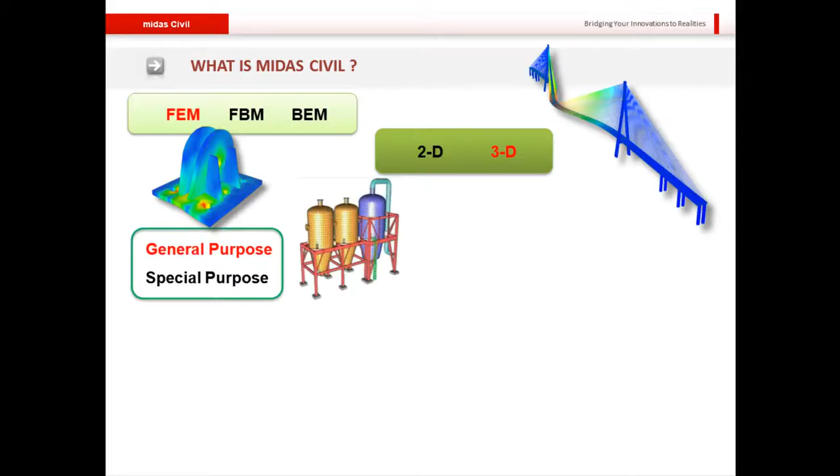So what is Midas Civil? Well, Midas Civil is a 3D finite element based package that is geared towards bridge engineers, but is by no means limited to bridge engineers. It is a general purpose product that can be used to create even models of structures like plant structures, tanks, silos, dams, tunnels, and many other such models. So even a geotechnical engineer can find some use for modeling and analyzing in Midas Civil itself. But of course, it is geared towards bridge engineers, and specific design functions are available for the bridge models only.

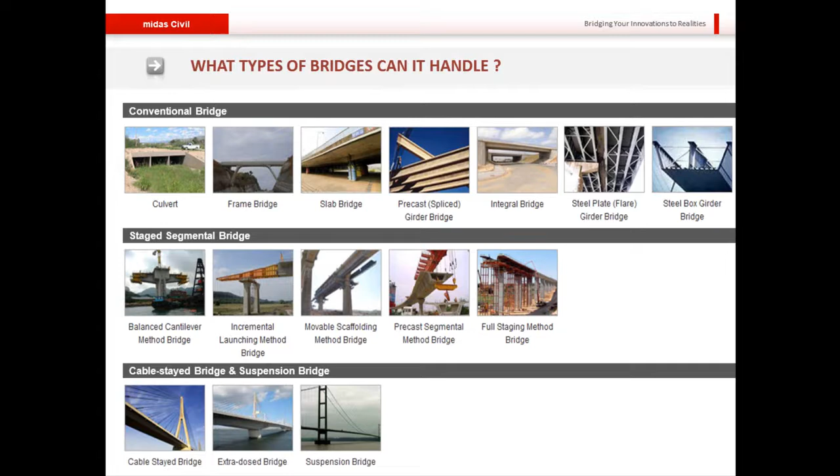So what type of bridges can Midas Civil handle? Well, it can handle quite easily the conventional bridge types like culvert, slab bridge, or girder bridge. It can even take care of the staged segmental bridges like balanced cantilever bridge, precast segmentally constructed bridge, the full staging method construction for bridges. So each of these construction methods can be easily dealt with in Midas Civil. And finally, Midas Civil is also very adept at handling cable stayed, suspension, or extradosed bridges.

So coming now to the modeling philosophy. First, I'll talk a little bit about the initial sizing. Aside from loadings, the pylon and deck geometry as well as the orientation are driven simultaneously by cost as well as by aesthetics. So normally the loadings only play a part in finding the section dimensions. However, the orientation and the overall shape of the bridge is driven usually by the aesthetic requirements.

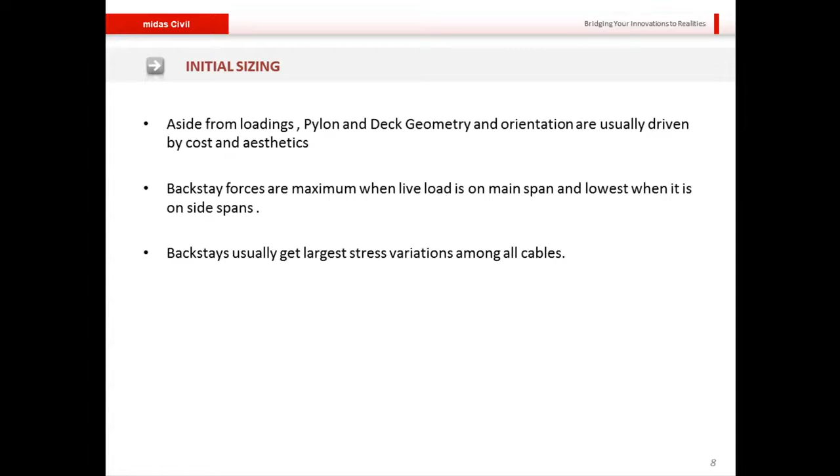Now coming on to the span length, or more importantly the ratio of side span to the main span. This ratio is determined by the backstay forces in the side spans, and the backstay forces are maximum when the live load is on the main span, and it is lowest when the live load is on the side spans. So the backstays usually get the largest stress variation among all cables, and therefore the span lengths have to be kept such that this variation does not exceed the fatigue strength of the steel material used in the cables.

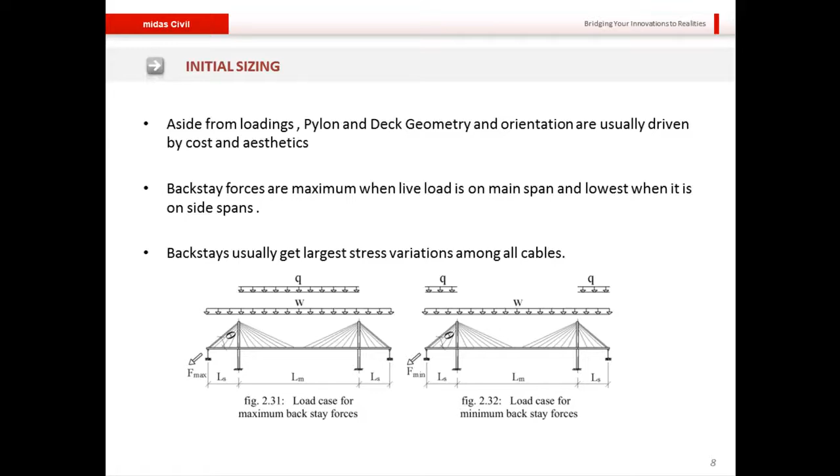This particular graph that I'm showing you is from Gimsing and Georgakis in 2011, where they investigated the relationship between the ratio of the side span and the main span, which they've plotted on the vertical axis, to the ratio between the live load and the dead load, which they've plotted on the horizontal axis. The value of zeta that you see just above the curves is the ratio between the absolute minimum backstay force to the absolute maximum backstay force.

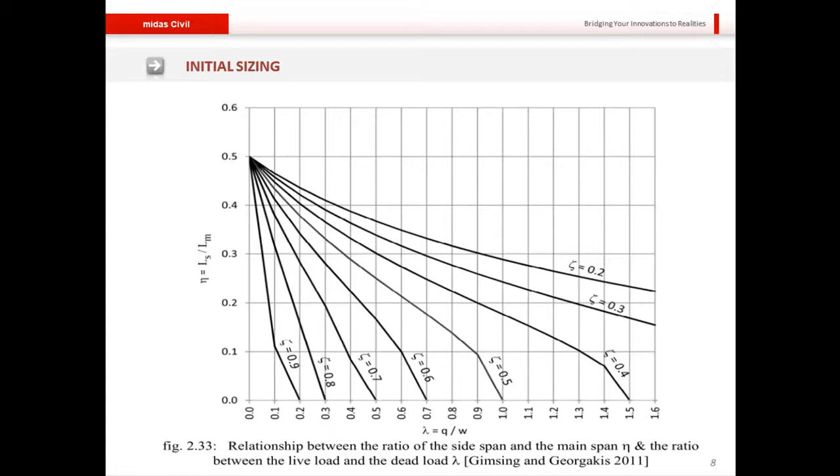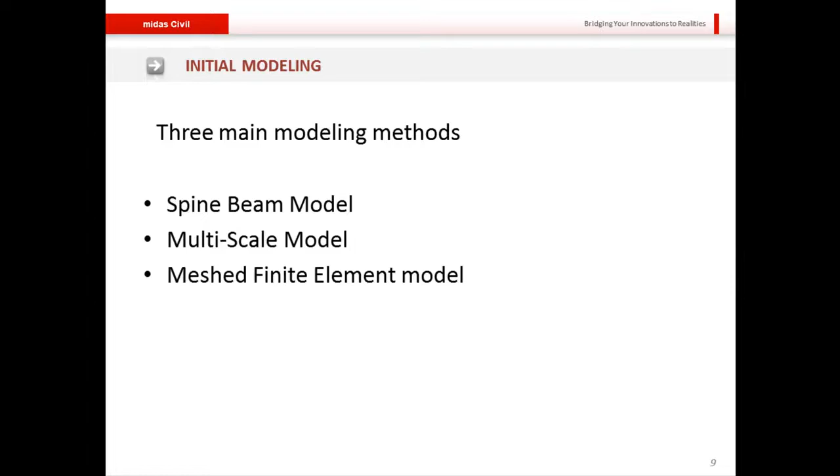Next we'll move on to initial modeling, and here there are three main modeling methods. First we have the spine beam model, we have the multi-scale model, and we have the meshed finite element model.

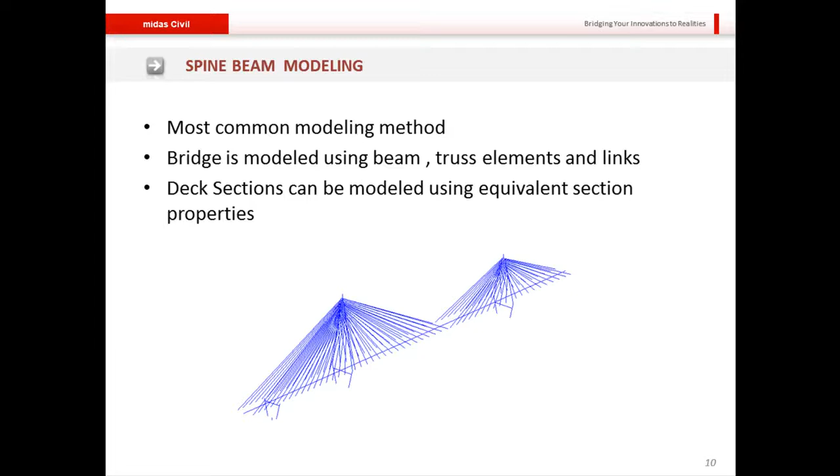First let me talk about spine beam modeling. This is the most common modeling method, wherein the bridge is modeled using beam and truss elements and links that represent the bearings, and the deck section itself can be modeled using equivalent section properties. So for the deck element, you need not actually go for the entire geometry. Equivalent section properties are more often sufficient.

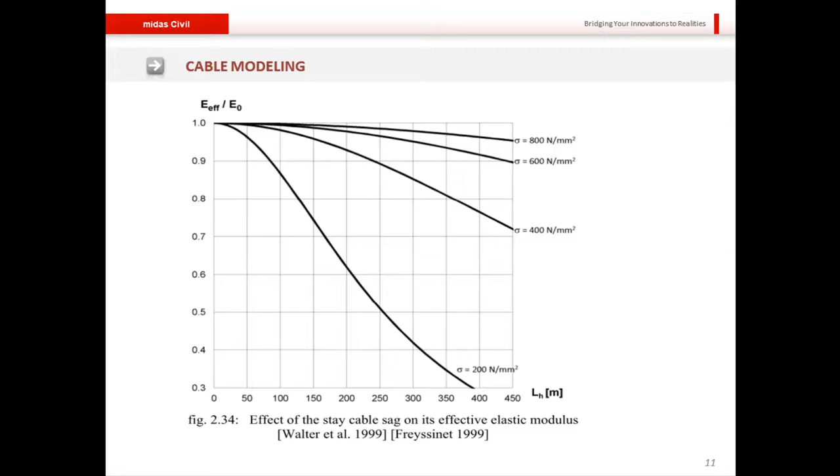This graph shows the variation of the effective stiffness of a stay cable relative to the horizontally projected length, which is related to its total overall length as well. As you can see, for the same amount of axial stress, the longer the cable, the lesser its stiffness, because of the more pronounced effects of sag.

Coming on to multi-scale modeling. In multi-scale modeling, we make use of different elements for creating a unified model of the bridge, so a combination of beam, plate, and solid elements is used. This type of modeling is more advantageous in that it can capture more accurate and localized results. However, in creating such models, one has to be careful and mindful of the different degrees of freedom for the different elements, so the interconnectivity between the beam, plate, and solid elements has to be carefully considered due to the differences in the degrees of freedom.

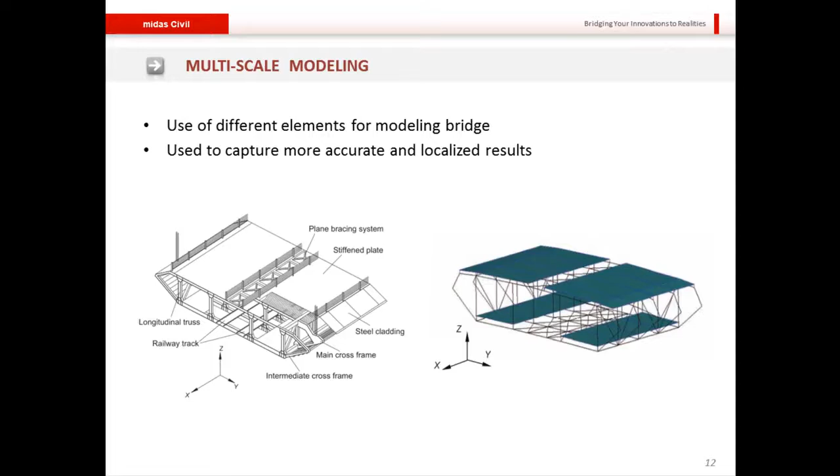And finally, we come to the meshed finite element modeling. This is perhaps the most realistic modeling of all, and it gives more realistic structural responses with an accurate representation of local and global responses. But this is usually quite cumbersome to model an entire bridge, so only certain critical portions are modeled and analyzed.

In this image on your slides, you see a saddle clamp for the cables that were used in the Bonny River Bridge in Nigeria. This particular model was created using our advanced finite element software, midas FEA.

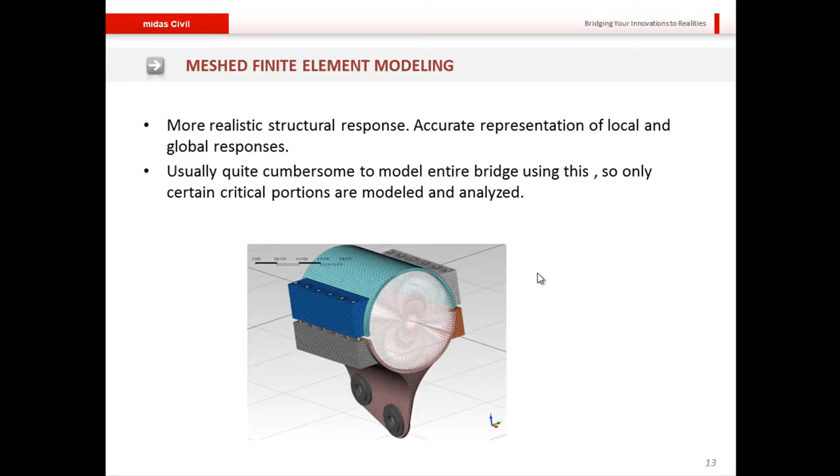Finally, let me talk a little bit about the support systems for conventional bridges. This particular slide shows the 6 common support systems that are used frequently for conventional cable stayed bridges.

In each of these support systems, you will notice that the deck is allowed to move longitudinally in one way or another, while most of the systems utilize expansion joints at the ends. Many others, for example cases D and E, you will notice that the expansion joint is provided at intermediate points. So it really depends on the site conditions, the cost, and the aesthetic considerations on what kind of support system the engineer would like to provide for his or her particular project.

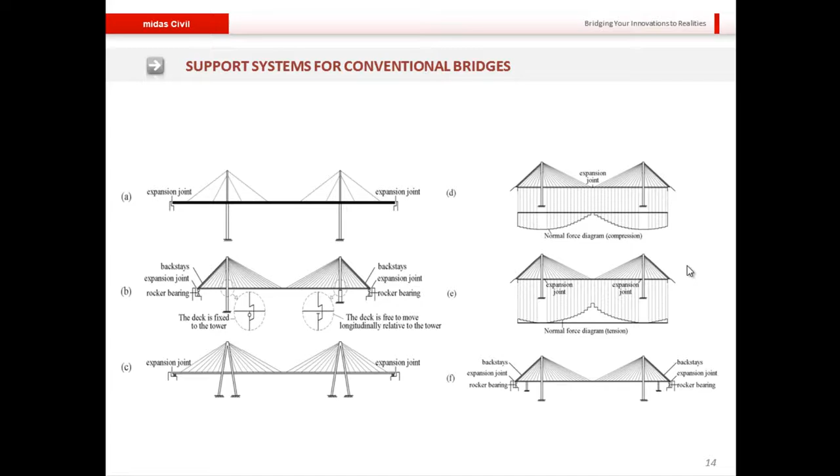So now, before moving on with the presentation, let me switch over to the software and show you how a particular cable stayed model can be made in our software Midas Civil. This is the interface of Midas Civil, and I'll open up the cable stayed bridge wizard. So this is the wizard itself.

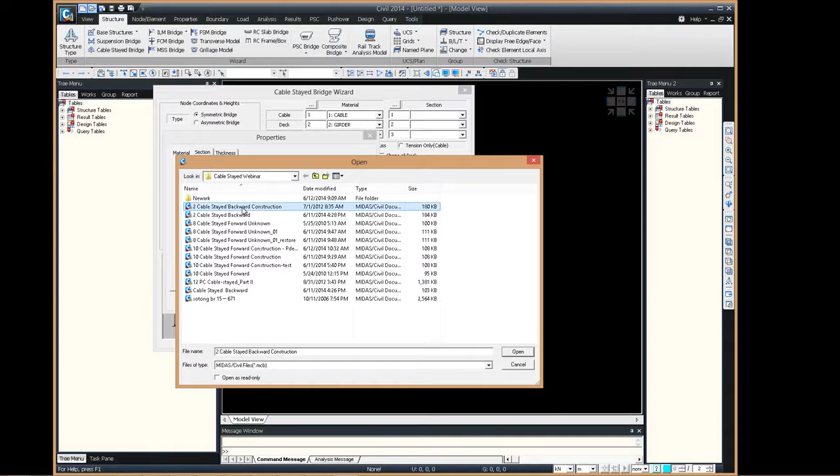Now I'll begin the model. First I'll import the material and section properties from a pre-existing model file. Here I'm importing the material properties from the model file that I had already created beforehand, and now I'm doing the same for the section properties. So here now I have all my section and material properties.

The section types I have used are value type, and in these dialog boxes I can specify the dimensions and the spacing for the cables, and also the shape of the deck. So here let me enter an initial slope of 5% and a total arc length of let's say 220 meters.

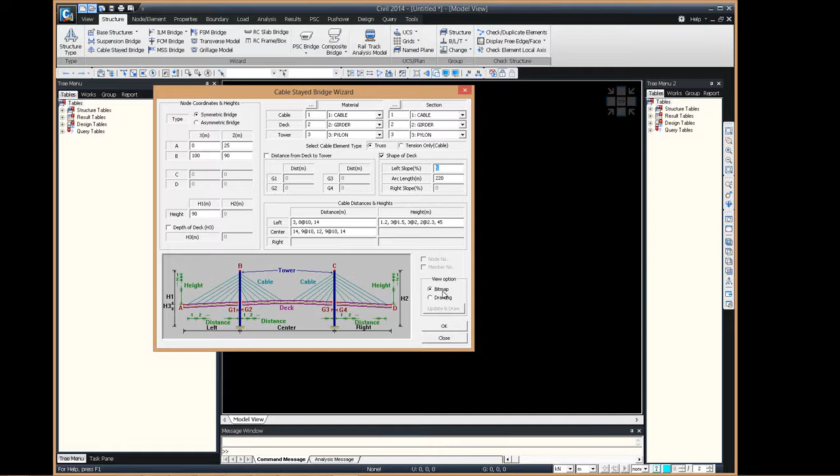If I want to see how the model looks, I can just click here, update and draw, and it will show me how the model looks. Furthermore, if I want to have my bridge as asymmetric, I can choose between the options. For now, let me just click OK, and my model is prepared.

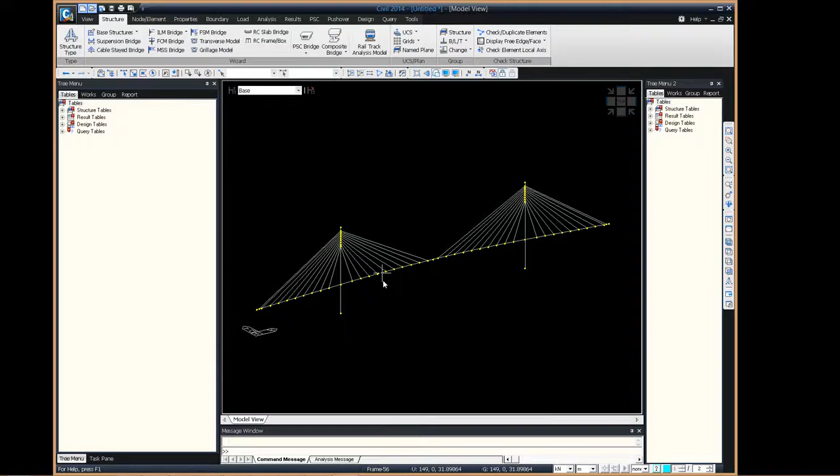Now what I'll do is create a copy of this particular model on its side. Going to elements, translate, I'm going to create a copy 15 meters apart.

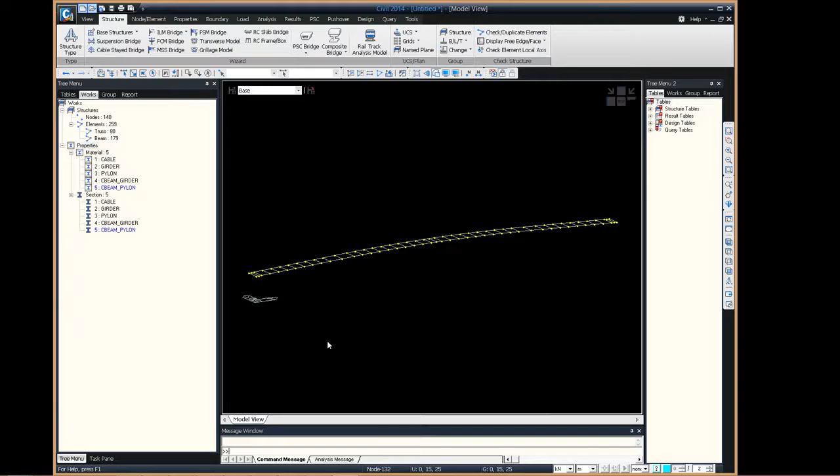Now that I have my copy, I'll activate the deck part and hide away the rest of the model, so I can create the cross beams. I'll simply extrude elements from these particular nodes to create my cross beams, selecting the cross girder material and the cross girder section property. With this, my cross beams have been prepared, and now I can go ahead and make modifications to the rest of my model.

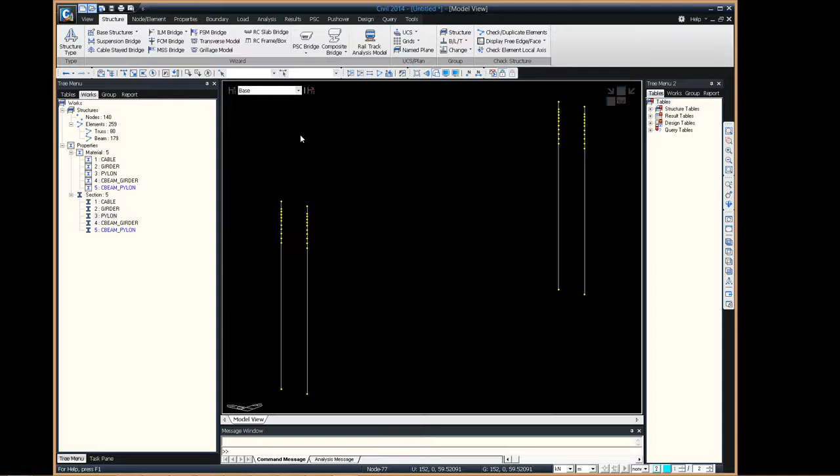For example, let me activate the pier parts, and now if I want to create cross member elements at the pier locations, I can simply do so in this fashion.

So with this, the model is more or less complete at this point. We can make more modifications to it as well, but for now let me get back to the presentation.

So let me now talk about the analysis philosophy. This is the basic philosophy or the basic workflow when creating and analyzing a model for a cable stay bridge.

First, we find the value of cable tension that will give the optimum deck profile for the final model. This is also known as the initial form finding or pretension value of the ideal state of the cable bridge. Once we have found this initial pretension, we do a backward construction stage analysis to find the cable forces during erection. In the backward analysis, we start with a completed model and keep removing elements one by one in an order reverse to that of the original construction staging, and finally we get the member forces within the cable elements, which are basically the erection forces that we need.

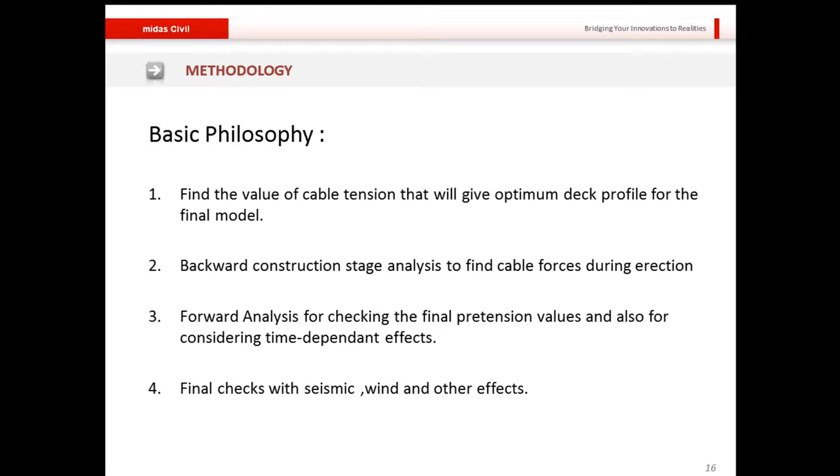The third step is usually a forward analysis for checking the final pretension values and also for considering the time dependent effects, and finally we do checks with seismic, wind and other effects.

So for the initial cable force finding, there are three basic methods: the continuous beam method, the bending moment envelope method, and the influence matrix method.

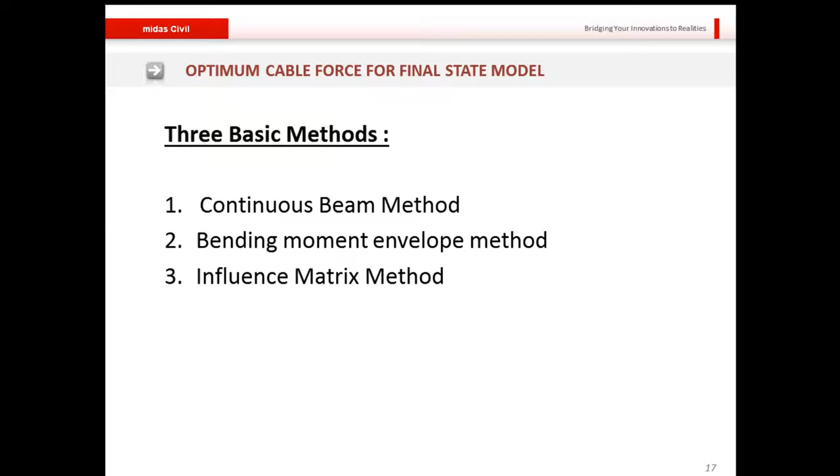Let me first talk about the continuous beam method. In this particular method, the points of connectivity between the cable and the deck are idealized as pin supports, and we find the reaction at each and every one of these supports. From these reactions we directly get the cable forces.

This method has some advantages in that the stay cable location helps eliminate creep in the vertical direction at nodal locations and also gives a very uniform displacement profile.

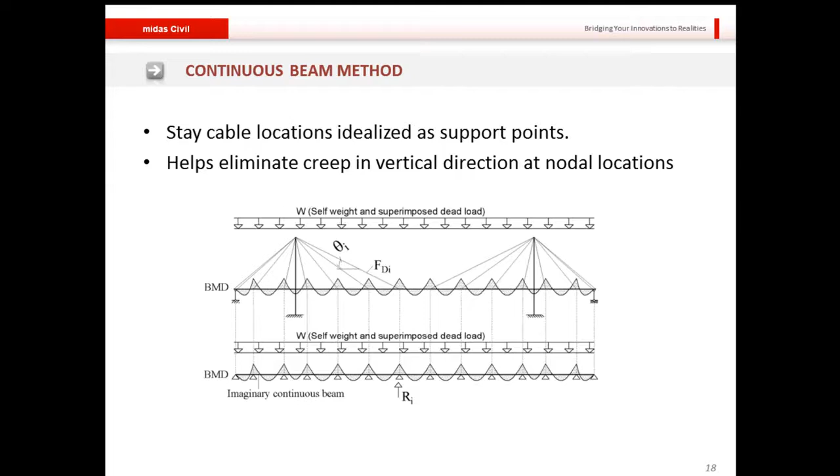Now, the bending moment envelope method was suggested by Svensson in his book Cable Stayed Bridges: 40 Years of Experience Worldwide. In his book, he mentions that the continuous beam method is not the best method for steel deck cable stayed bridges from the economic standpoint.

Normally when using the continuous beam method, you only apply the initial loading as dead loads. We do not initially consider the live loads. The live loads are added later on. Once the initial pretensions have been found, they are added in the form of an envelope. As you can see in figure B on this slide, this is the profile we would normally get if we consider the continuous beam method.

But Svensson suggests that from an economic standpoint, we should consider the bending moment profile as in part C. This particular bending moment profile can be achieved after tuning the cable forces such that the bending moment profile in the deck is as low as it can be, or within the lowest permissible limits.

Obviously this particular method would give more economic deck properties. However, because we are increasing the amount of pretension in the cables, this directly means a higher amount of cable material needs to be used, and therefore for this particular method the cost of the deck has to be compared with the cost of the cables arising from the increased amount of pretensioning.

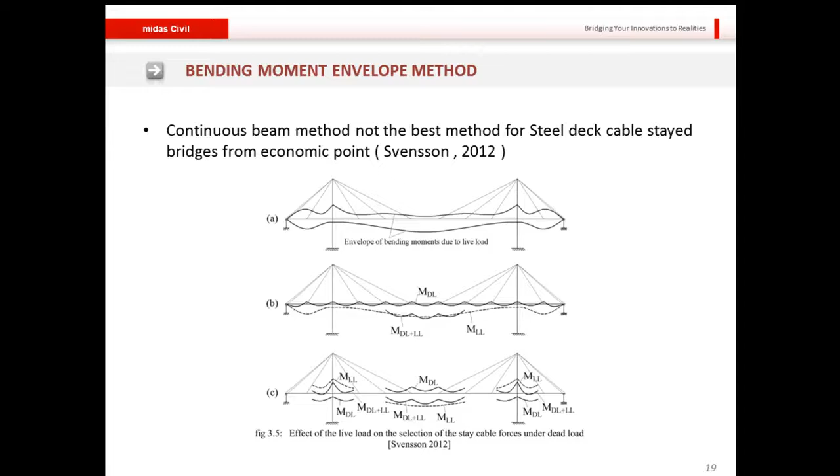And finally we have the influence matrix method, or as it is known in Midas Civil, the unknown load factor method. In the influence matrix method, basically we have a matrix of influence coefficients made to reflect the effect of loading in one or more cables on the rest of the structure. So any loading in one cable is obviously going to affect the entire structure.

This particular matrix reflects that behavior, and furthermore this matrix can be modified to accommodate different types of constraints, like displacements, reaction forces, moment profiles and influence coefficients, and those particular influence coefficients can then be directly used.

Furthermore, this particular method can and has been modified to incorporate a range of values. So for example, if you do not want to give exact values but rather a range of values, that can also be done using the influence matrix method, in which case an optimization technique has to be used to arrive at the most optimal solution.

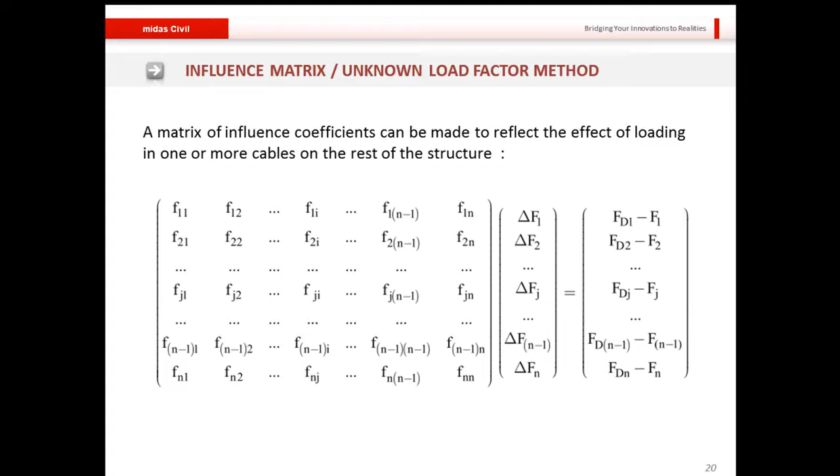Once you have found your initial pretension values from any of the three methods, it may happen that these pretension values don't exactly fall within the desirable range for that particular material. So the cable forces may need to be tuned slightly, and in this case Midas Civil provides the cable force tuning option, wherein a user can directly tune the cables manually and see what effects that tuning will have on the entire structure.

So let me now switch over to the software and show you these particular features. Let me open up a pre-existing model file.

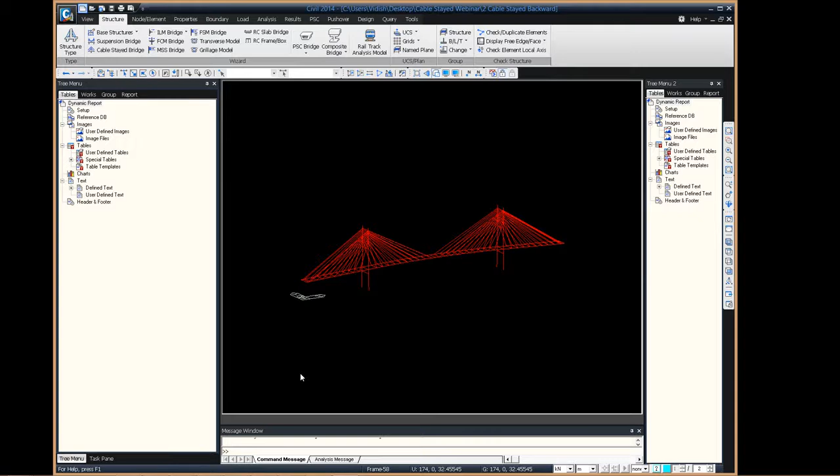This particular model has already been analyzed, and as you can see on the left side in the works tree, there are a lot of load cases that have been added, and many of these load cases are pretension load cases. Let me show you - each of these pretension values has a value of 1 kilonewton only, so basically we are just using the unit load method.

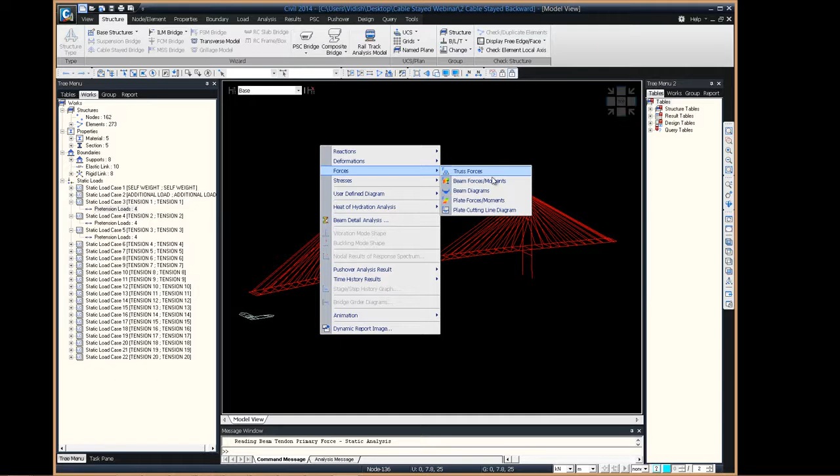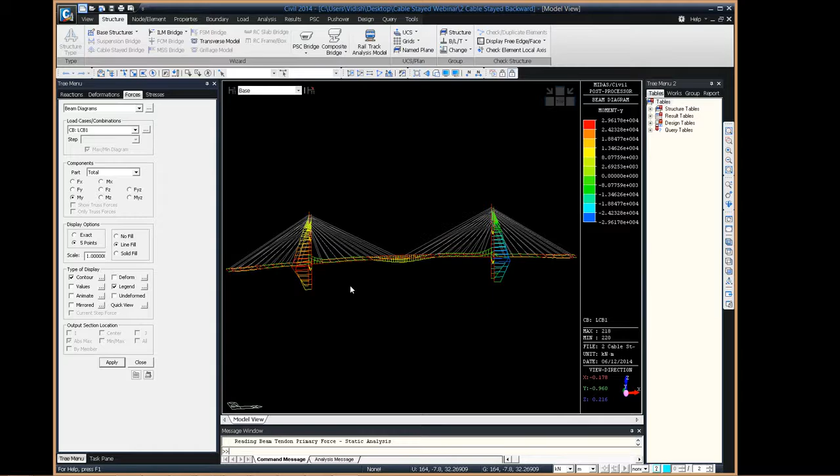Now let me show you some results. Let me show you the bending moment diagram for the combined case, that is self weight plus the unit pretension loadings. So here this is the bending moment profile that you get for the self weight load case combined with the load case for unit pretensions in all cable members. As you can see, at the mid span we have quite a lot of bending moment, and quite a lot of it at the pier locations as well.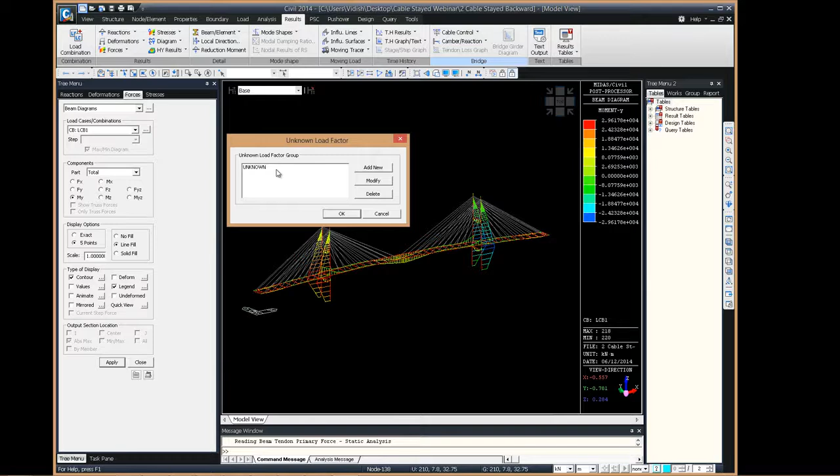Now let me go over to the unknown load factor method, or the unknown load factor function. So this is the unknown load factor function in Midas Civil. Here I have selected all of the pretension values that are required to be unknown. As you can see, the self weight and additional loadings are already known, so their factor is 1, whereas the unknown load factor is to be applied only on the cable pretension points.

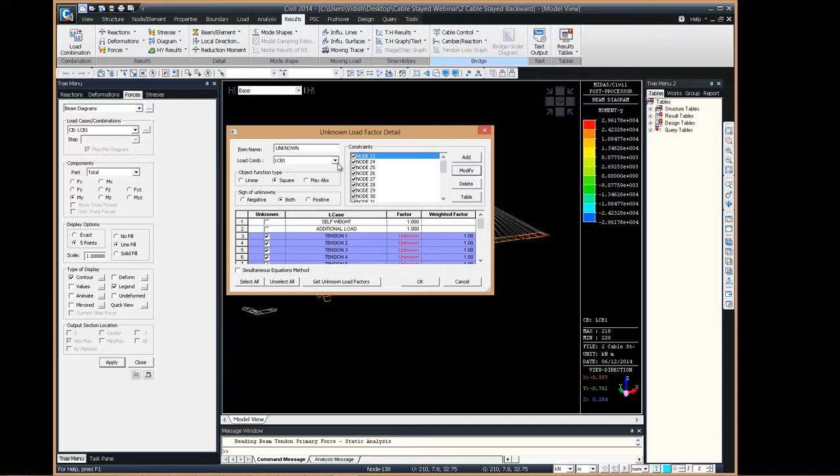Up next we have the constraints. As you can see, there are several constraints - node 25, 27 and so on. Each of these constraints is a displacement constraint, wherein it has been assigned with an inequality, so we have an upper bound and a lower bound. With this, Midas will calculate and find the optimal solution within this particular range of values.

So let me get the unknown load factors, and here you see the load factors that are to be applied to the pretension values. These are the particular load factors that are needed for the ideal state.

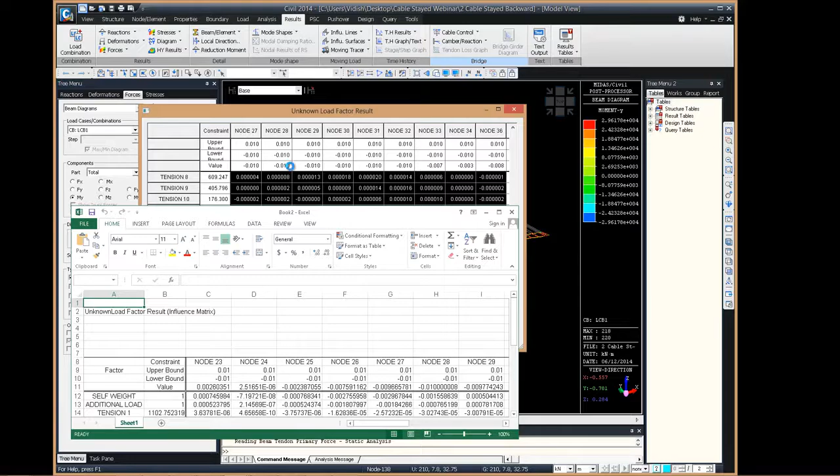Now if you want to check the influence matrix, you can even do that. As you can see here, this is the influence matrix for this particular cable bridge model, and if you want, you can even create an Excel sheet. Let me show you - so this is the Excel sheet that is created and has the influence matrix values.

So all the influence coefficients are there, and furthermore this Excel sheet has the equations written into it. Let me show you - here you can see these are the equations that are written into it. So for example, if I modify any value, automatically the other values get affected. This is something that can be easily added to one's project report.

Now let me just create a new load combination for this. Let's say 'modified', and now let me close it.

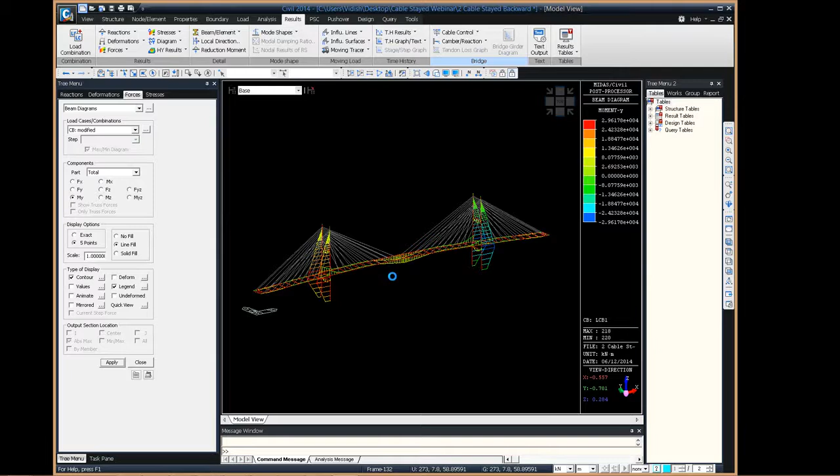Let me now show you the results for the modified load combination with the modified cable pretension values, and immediately you will notice that the bending moment profile has changed drastically. As you can see, the deck moments seem to have reduced quite a lot, and the value of the bending moment itself has also reduced.

So this was using the displacement constraint. Of course, one can apply other forms of constraints as well, depending on the requirement.

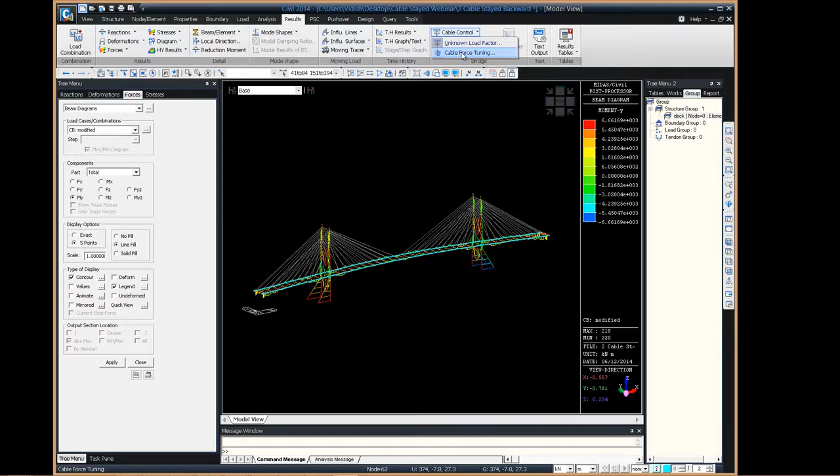Now first let me create a structure group, and the reason I'm doing this will become clear shortly when I show you the cable force tuning option. So I'm just going to add the entire deck portion in my deck structure group, and now let me go over to the cable force tuning option.

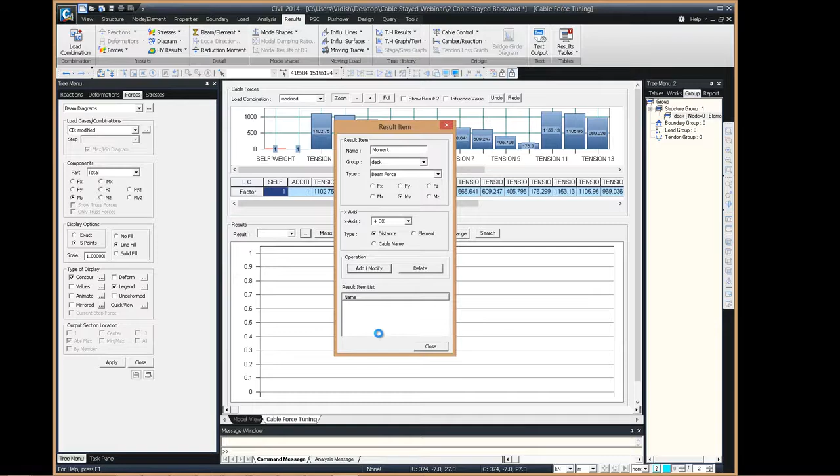So this is the cable force tuning dialog box. Let me select my load case as modified, and let me create a case or a group for my deck moments, and I'm going to choose the beam force, and as soon as I add it, I get the moment profile within my deck.

So this is the moment profile in the deck group, and here I can modify the cable pretension in real time and observe its effect, or the effect of the change in pretension values upon the entire model. As you can see, as I am modifying the cable pretension, the graph changes according to the influence matrix.

This is particularly useful if one wants to observe the effects of rounding off, since in the field it is rather hard to give exact decimal point pretension values. One may need to round values off, so here you can simply observe the final effect of this particular activity.

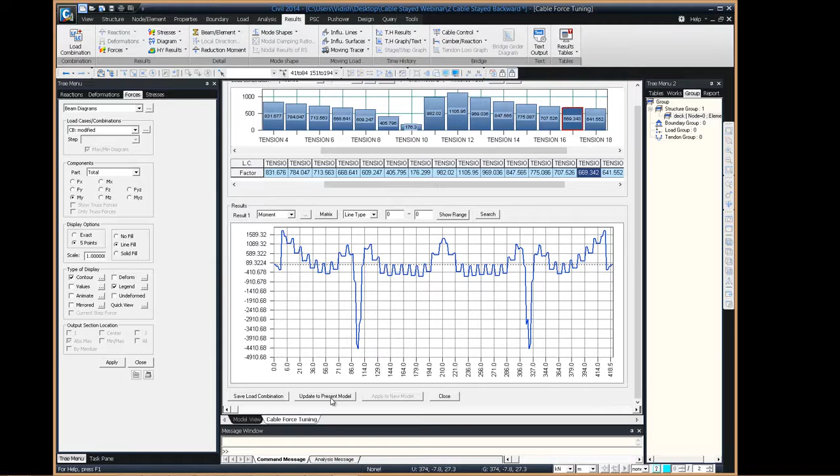So once you have finalized your forces, you can simply update them to the present model, and it will ask you to delete the analysis results. And now when you check the pretension values, I'll go to the tables, so they will not be unit values now, but rather the modified values that have been tuned using the cable force tuning option.

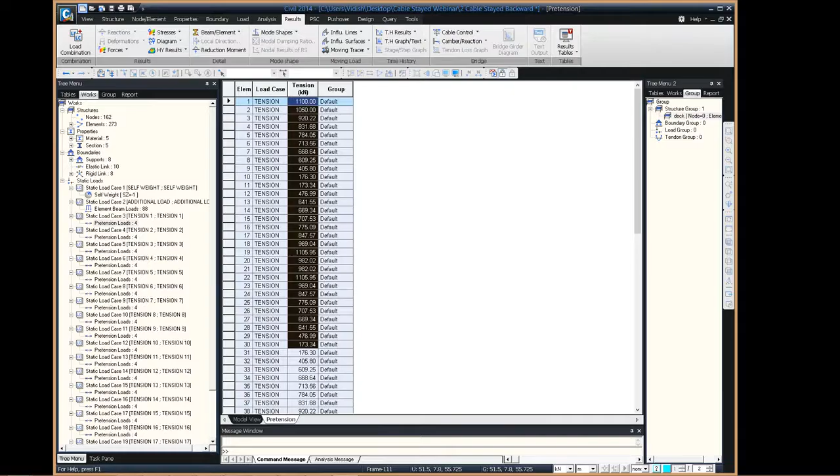So now let me get back to the presentation. Coming on to construction staging: in case of cable stayed bridges, we normally have two kinds of construction stage analyses.

First is the backward analysis, which is used to find the cable forces during erection. This does not account for the time dependent effects. Secondly, we have the forward analysis, which is used usually to confirm the backward analysis results when creep and shrinkage are not considered, and it can account for the time dependent effects as well.

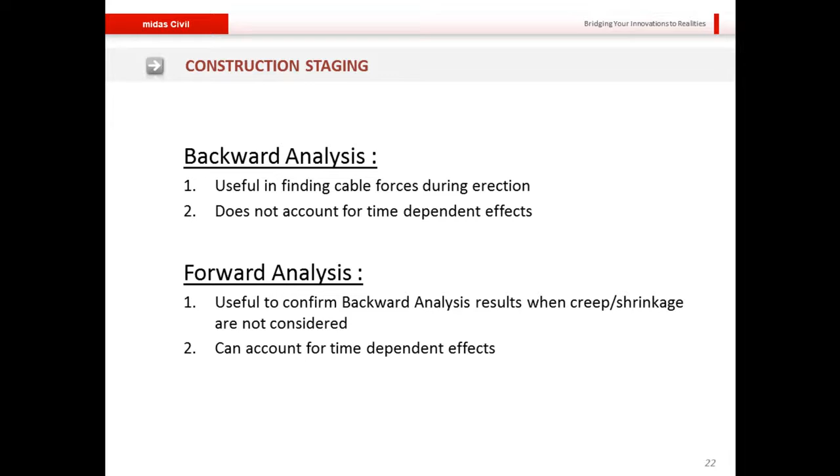Now this particular slide shows the basic iteration process. As you can see, the basic workflow is what we have followed thus far: we go for an initial cable pretension analysis, then the final stage analysis, and from here we go over to construction staging, wherein we verify the member forces and tune the cable forces as required. And one final analysis has to be done with construction staging, considering the camber.

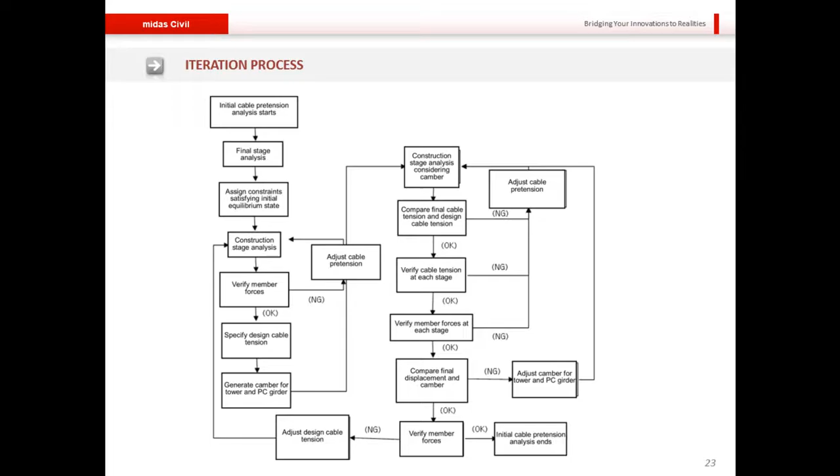So first of all, let me shift over to the software and show you the construction staging methods in Midas Civil. So this is the model of the backward analysis. Let me show you the progression of this model through the different stages.

So at the first stage we have the final model, and in subsequent stages we begin to remove the cable segment by segment until finally we reach the point where there are no cables installed. So here this is the progression in the model, and I'll just switch over to the final stage, wherein you can see there are no cables installed.

Now, in order to find the erection forces, we need to find the member forces within the cables at the time of erection.

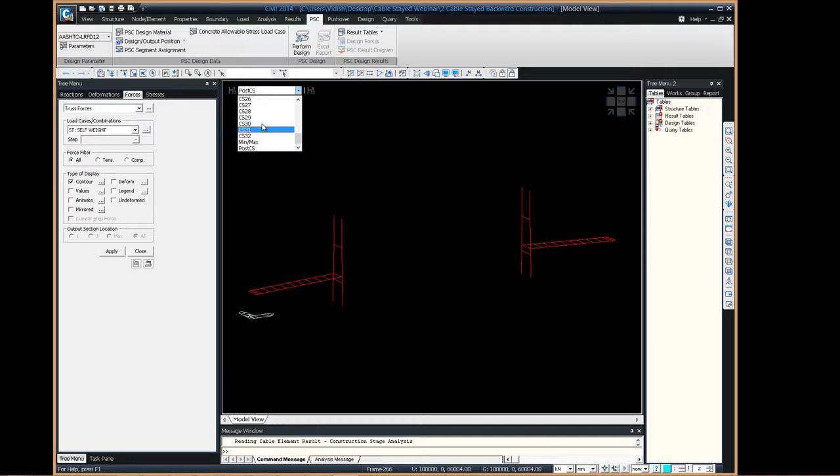So here let me switch over to truss forces, and let me start off with the last stage, that is CS30. This is the stage at which the first cable was installed, and this is the value of the cable force that needs to be entered for this particular cable.

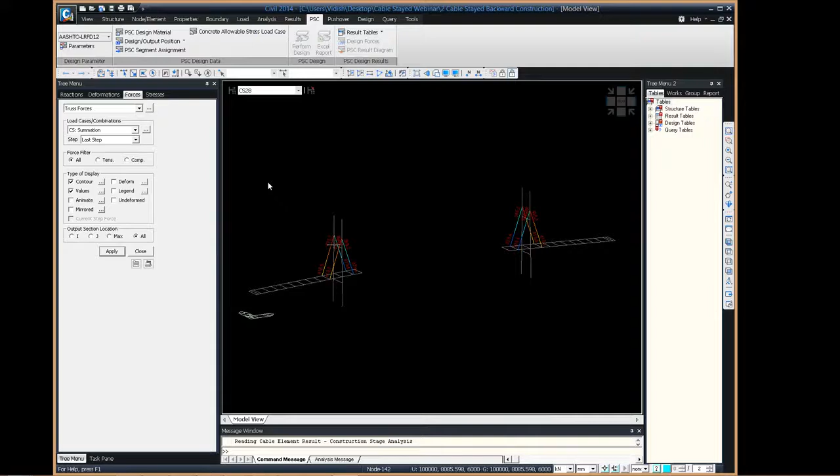Similarly, the value for the other cable, as you can see from here. Then for the third cable, installation forces can also be extracted from here, and in a similar fashion for the other cables.

Now let's talk about lack of fit force. When a segment is added to a bridge model during construction staging, that segment undergoes some deflection. This deflection changes the member forces in the cables, and during backward analysis we extract this changed cable member force information and use it as external pretension for forward analysis.

Midas Civil has a feature called lack of fit force, which essentially calculates the amount of force needed to push the deflected segment back to the ideal state position. Thus, in effect, this feature removes the necessity of backward analysis, since the lack of fit force results can directly be added to the initial pretension force after analysis, and the same model can then be reanalyzed.

So what this means is, basically, if you use the lack of fit force function, you need not do a backward construction stage analysis. So let me shift over to Midas Civil and show you how this can be done.

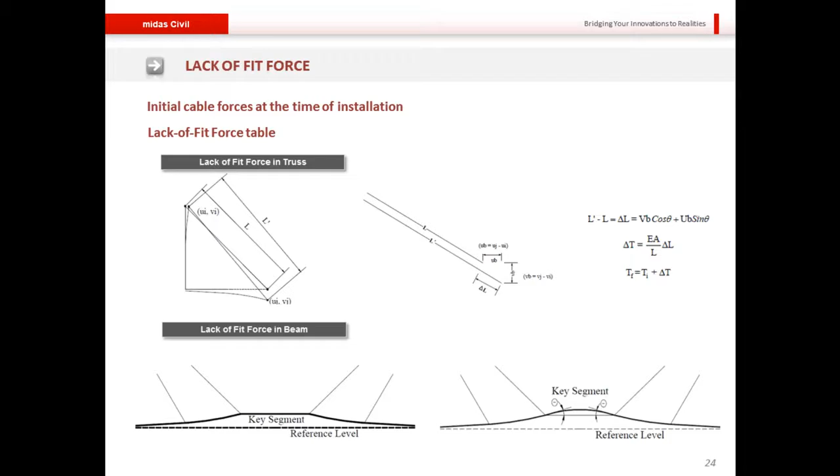So in this new model that I've opened, I will demonstrate the lack of fit force feature. First, under the construction stage analysis control, here we have the initial tangent displacement for erected structures, and this is the lack of fit force activation.

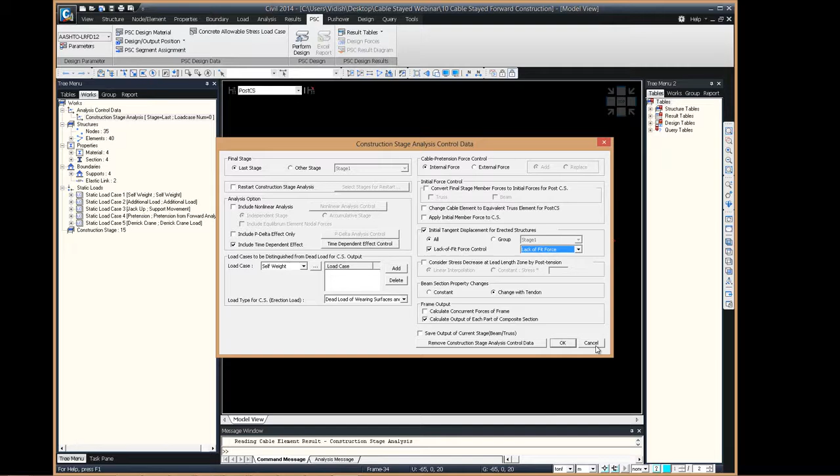From here this feature gets activated, and here I have already described a structure group called lack of fit force. Let me go ahead and show you what elements are under this particular group.

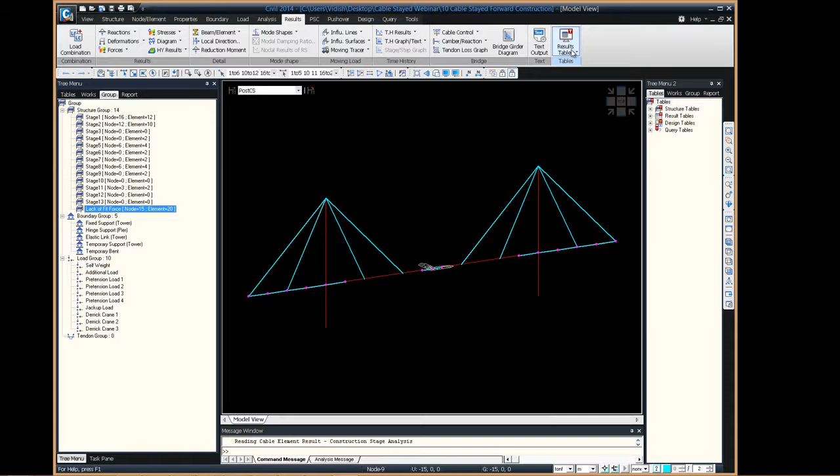You can very clearly see that the elements are basically all the cables in this model and some parts of the deck, as well as the key segment. Basically wherever the jacking up needs to be done, those parts have been included in this particular group. Now let me show you the results of the lack of fit force analysis.

So here these are the results for the cables, and as you can see, Midas gives you very detailed results on what is the actual lack of fit force and what is the summation of these lack of fit forces with the initial pretension values. So you can directly use these values for the forward analysis.

Now similarly, we also have lack of fit force values for the deck sections. So here, as you can see, we have the lack of fit force for these deck sections, these key segment deck sections, and the program gives very detailed values on how much.

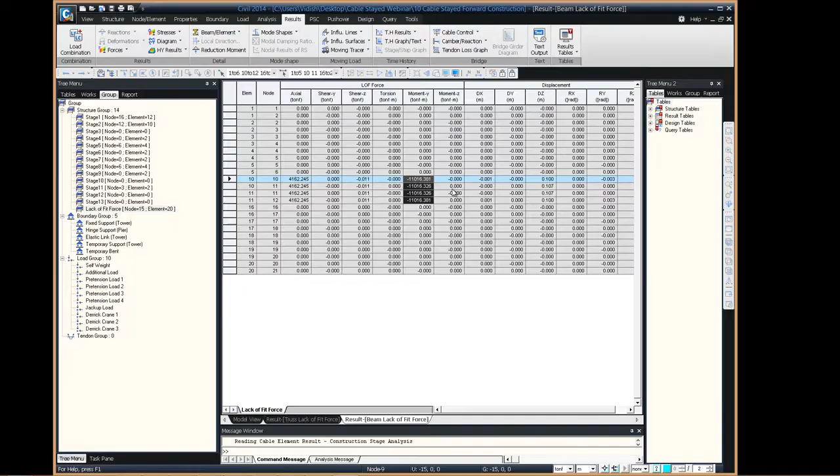Now coming on to camber calculation. Camber calculation is one of the many requirements for cable stayed bridges, and in fact it is one for nearly all kinds of bridges. For cable stayed bridges it is particularly important because the cable forces are very sensitive to the deflections, and therefore it is the engineer's prerogative to achieve as close to the ideal state once construction is done as possible.

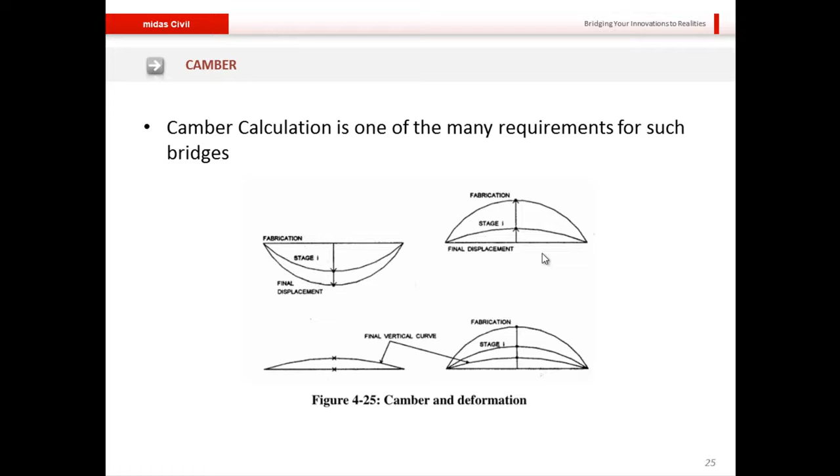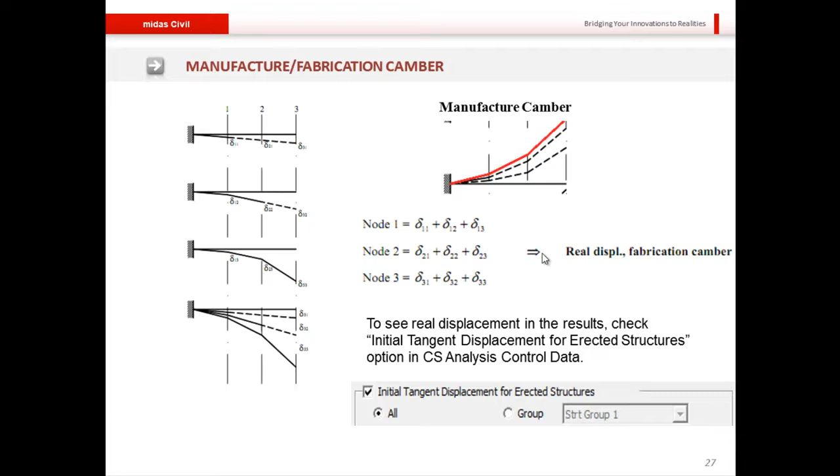So let me show you the camber calculation in Midas. First I will add a structure group, and now let me calculate the camber value. I am calculating for the summation load case.

So here you can see this is the general manufacture camber across the different nodal points of the deck, and this is the construction camber.

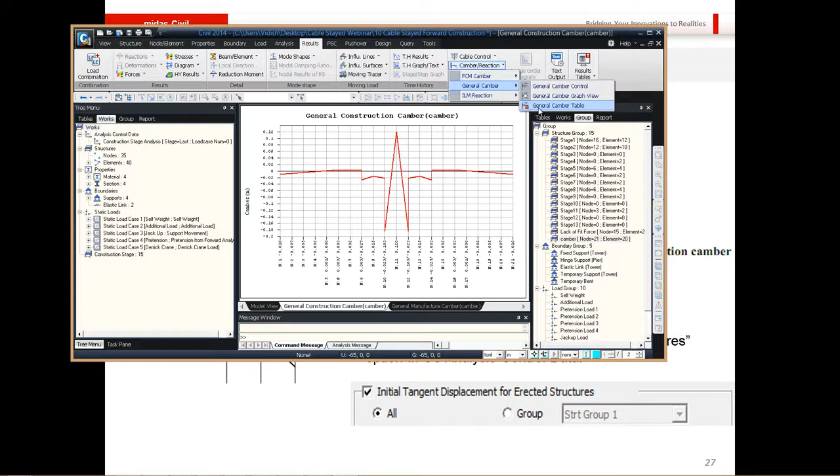So you can even get the camber value in tabular format, again choosing the summation load case. Here these are the tabular values at different nodal points.

Now let's discuss nonlinear effects. There are three major nonlinear effects to be considered in cable bridges. First is the sag effect of cables. The second is the P delta effect, or the second order effect. And the third being large deformation, or third order effects.

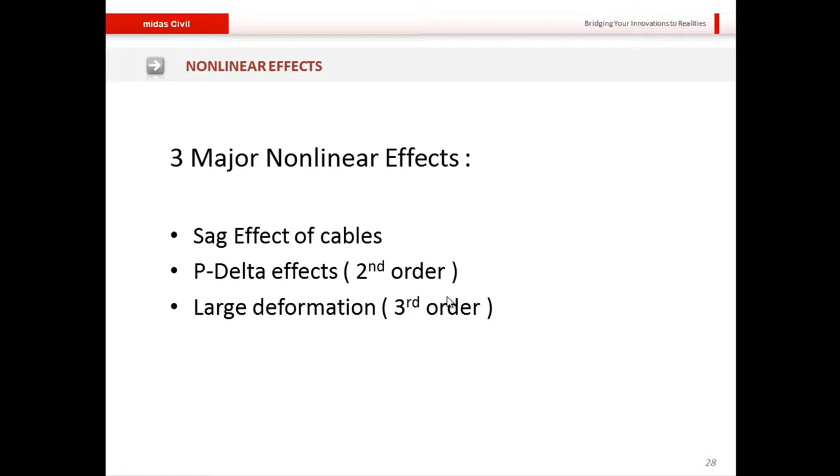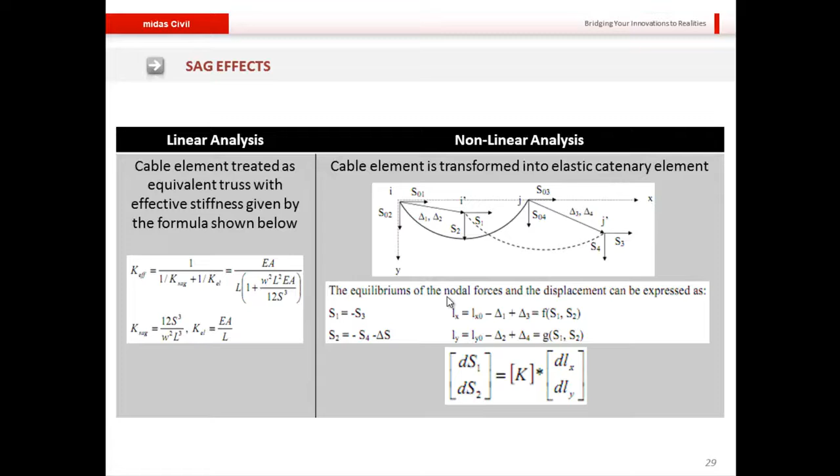Coming to the second order effects. For short to medium span bridge deflections, since they are quite small, the second order effects can be limited to the live load effects only. This basically means that the initial pre-stress calculations and the dead load themselves can be done considering only the first order effects, while the P delta effect needs to be taken only when the live load is considered.

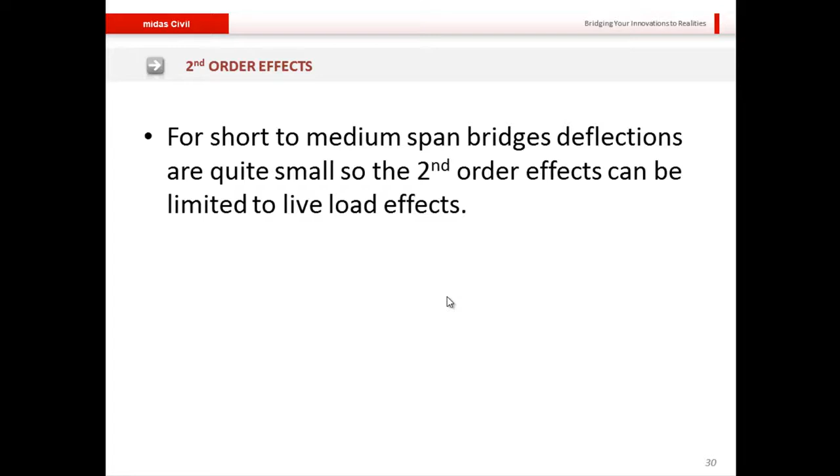Now for long span bridges, however, these should be considered for both construction and final stage calculations, particularly because the second order effects can even affect the ideal state itself.

And finally, coming on to third order effects. For a very long span bridge, large deformation analysis may indeed need to be done. This is usually done by analyzing it using the geometric nonlinear analysis, and this figure I've pasted on the slide is for a very famous analysis method, the Newton-Raphson method for geometric nonlinear analysis.

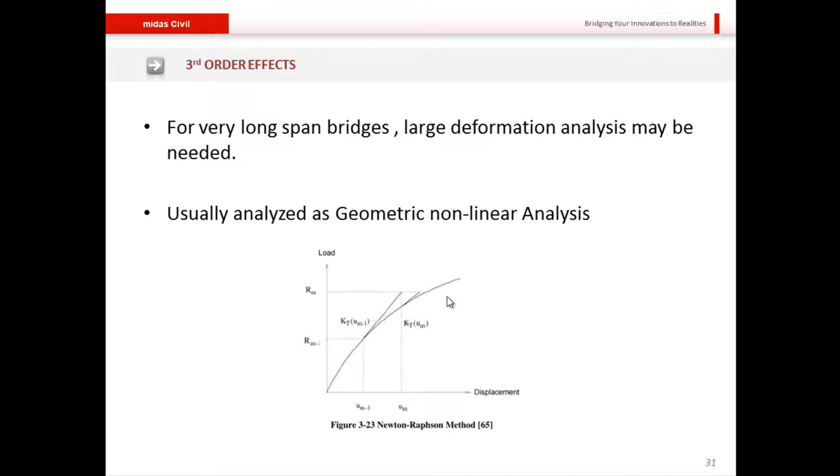Regarding P-delta nonlinear analysis in Midas Civil, you can activate these features from the construction stage analysis control, and here you get different options. Depending on your requirement, you can do a complete nonlinear analysis, or you can do an analysis considering P-delta effects only. If you consider the P-delta analysis only, you will get options for controlling the iterations and the convergence criteria.

If on the other hand you decide to go for a nonlinear analysis, you will get the option to choose between the independent stage and the accumulative stage. The independent stage is used for backward analysis, wherein the previous stage should not affect the results of the current stage. So if you're going backwards through time, the previous stage would actually be the stage ahead in real construction. Coming to the accumulative stage, this is used in case of forward analysis, wherein the previous stage does affect the current stage.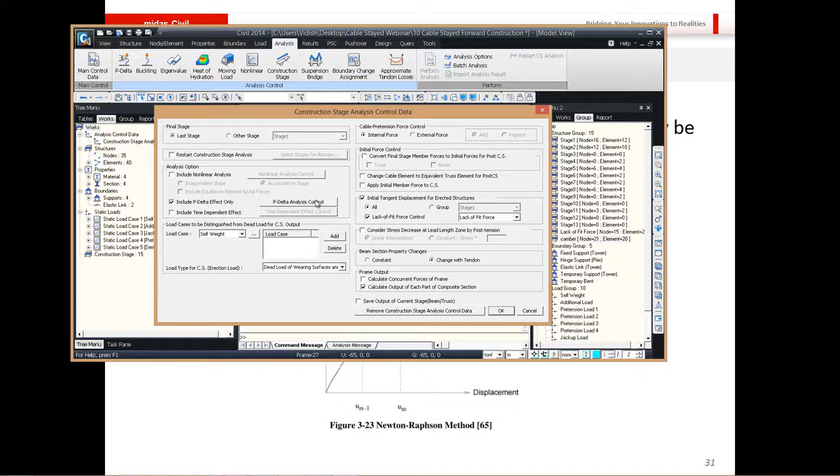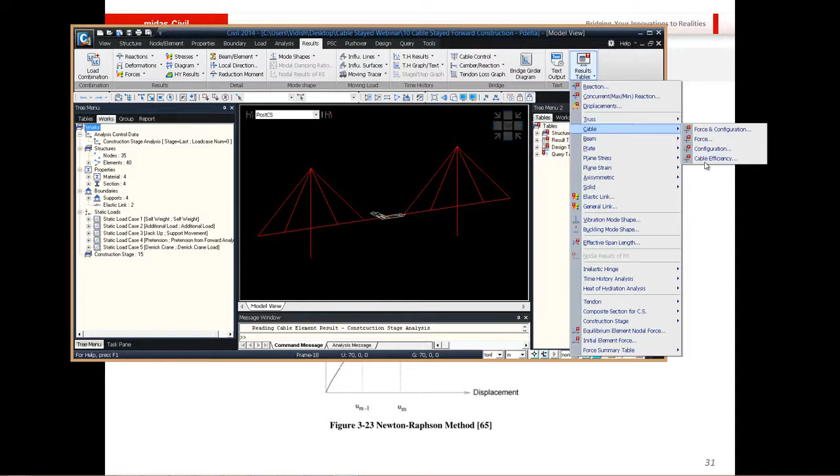So right now let me show you selecting P-delta analysis. This is a different file that I've opened, wherein the result file has already been analyzed together with P-delta effect, so the results will reflect the P-delta effect as well. All the member forces, for example the member forces for the cables, etc.

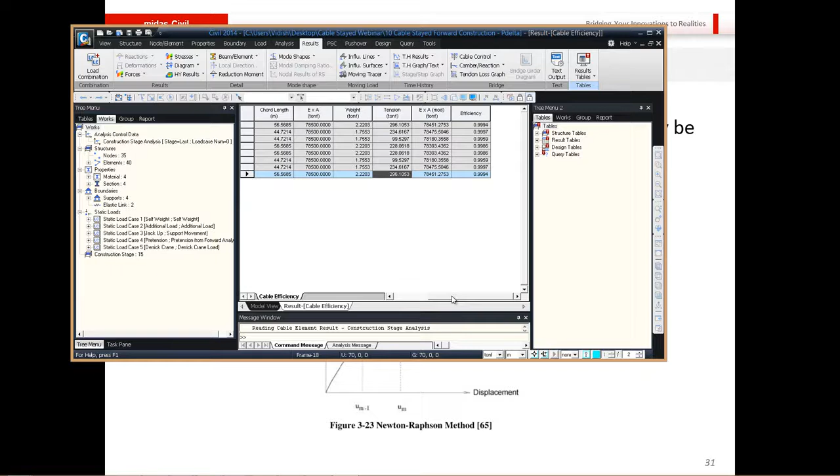Now let me also show you one feature called the cable efficiency feature. With this particular feature you can directly get a measure of how efficiently a cable is acting, and the cable efficiency is basically a measure of its current utilized stiffness to that of its total material stiffness. With this result, you can very easily check on how much stiffness is being utilized for each and every cable.

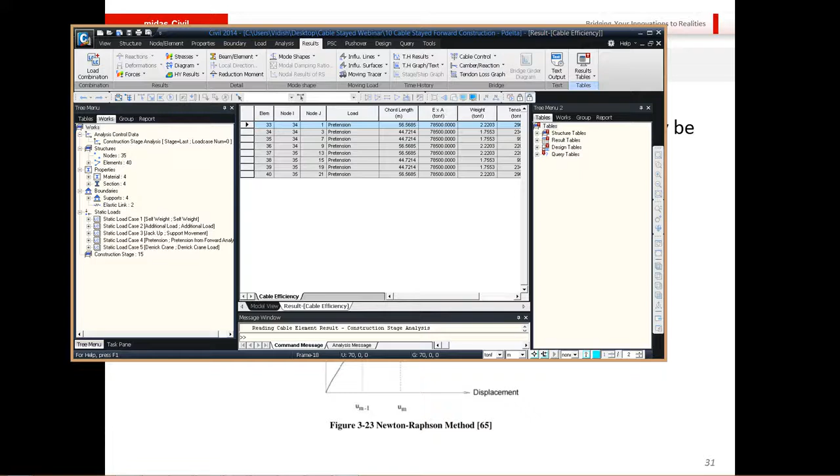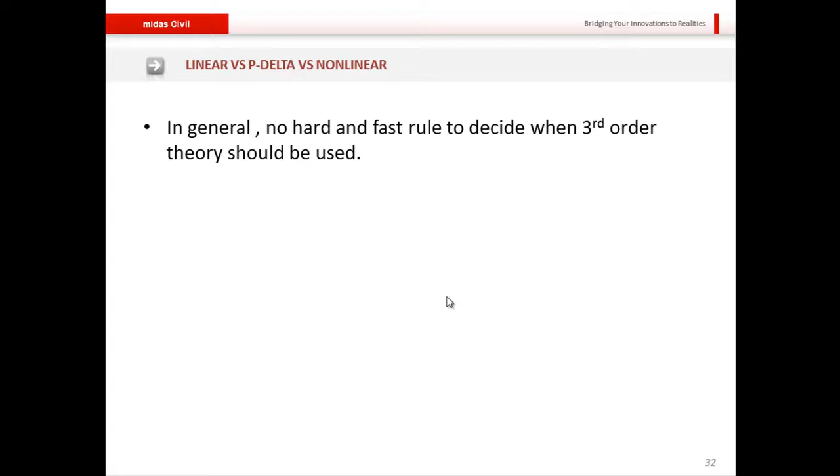Now one question that may come to you is, what is the cutoff? When should we use linear, when should we use P-delta, and when should we use nonlinear analysis? In general, there are no hard and fast rules to decide when a third order theory should really be used. For the most part, engineers agree that the second order effects are quite sufficient.

However, for short span bridges, Virlogeux and others have suggested that the dead load distribution be first analyzed as first order, and second order checks be done only for live load computation, as I had mentioned before. Furthermore, Wang and others have suggested that for main spans beyond 600 meters, third order theory is recommended. Again, this is just a few researches that I have cited here. Other researchers may have other opinions, other engineers may have different opinions depending on their experience. So it really all boils down to what is the engineer's opinion based on his or her particular project.